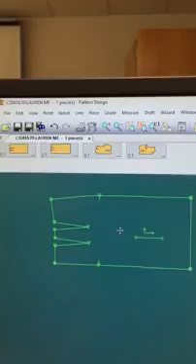Now bring them down into your work area.

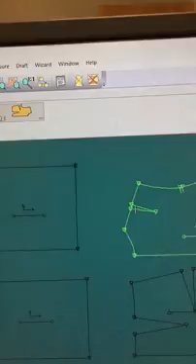The first thing that we have to do is to fold out our darts. So we go to Piece, Darts, Fold Dart In. It's telling us over here to select the dart on the side to fold.

We want to make sure that we include our fold lines, include dart drill holes, and include our notches. So we always want to fold toward the center front. So in this skirt, we're going to close on this side.

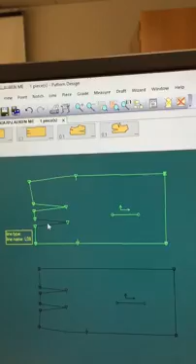Right click, OK. Okay, and it closed that dart.

Over here, it's asking us how far to drill to the apex. 0.25. Say OK.

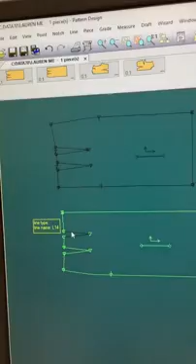Here's our center back. So we want to fold to this line. Right click, OK. This line, right click, OK.

This one is toward the center front. Input for our drill hole, 0.25.

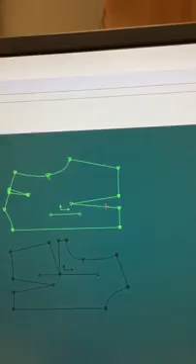This one is toward our center front. Drill hole, 0.25.

This one is toward our center front. Drill hole, 0.25.

This one you always want to fold down. So this one we're going to click this, 0.25. So all of our darts are folded out.

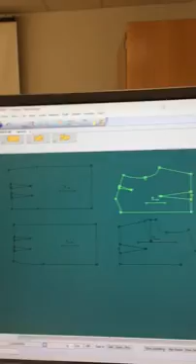Okay, now we need to see which one that we're going to fold on the mirror. This one appears to be our center front. So this is the one we want to fold.

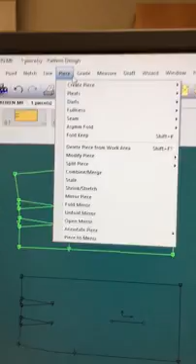So we go to Piece, Mirror Piece, and it says to select the piece that you want to fold. Make sure that you fold after the mirror. Right click, OK.

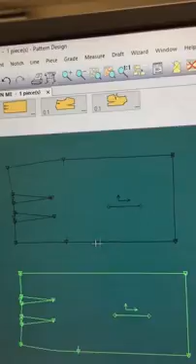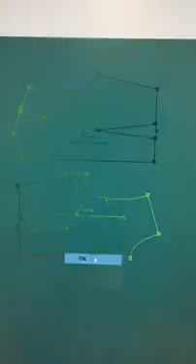Alright, and we have a dotted line there. This is our front piece, this is our back because we have a back dart. We're going to fold on the front. Right click, OK. Alright.

Alright, so we get out of there. The next thing that we need to do is to add seam allowances. Piece, seam, define/add seam.

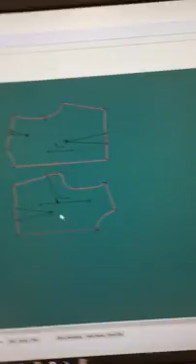I'm going to click on all of my pieces because I want a 1/2 inch all the way around. Go over here, 0.5. So I have a seam allowance on each piece.

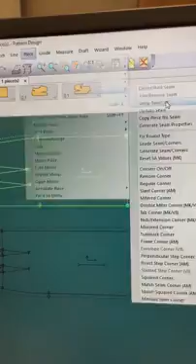But we can't leave it that way, can we? Right click, cancel. You have to go to piece, seam, swap sew cut. So we click each one of them and we swap the sew cut lines.

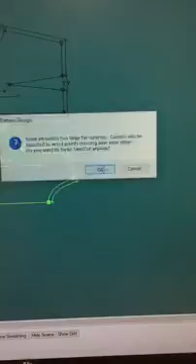If you get this error, that just means that you have some small areas that need to be swapped. Are you sure you want to? Yes. So now it should show you that you have either two solid lines or you have the solid line on the outside.

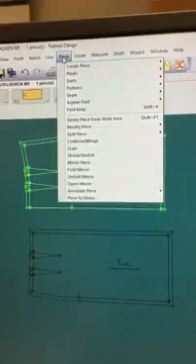The next thing, if you want to do, is to annotate the piece. So you go to piece, annotate piece, add annotation. So wherever you put your mouse, that's where you're going to put it.

So this is going to be my skirt, front, and I have to hit OK.

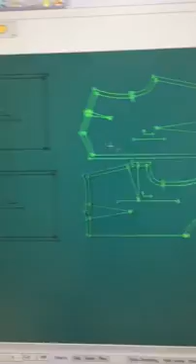Well, it's little bitty. So I go back to piece, annotate piece, edit. So I click on it, right click OK.

The box comes up, and in the default, say I try 5 and hit apply. Well, that's way too big.

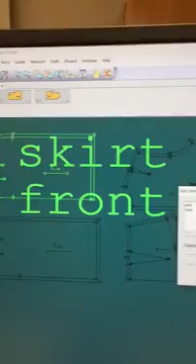So I go back and maybe 2.5, hit apply.

It's okay. All right, now if I want to copy that to the back, I just hit copy and it's attached to my cursor. I put it here and I go back to the box, and then I would take and then erase that and put back.

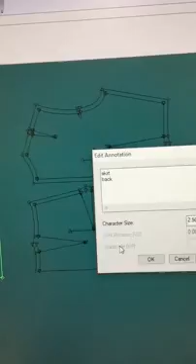Apply. Now that's changed. All right, so I want to copy again. We know that this is the back, so I leave it here, except I put bodice.

It's a little bit big, so maybe I want to take it down to 2. Hit apply. Maybe a little bit more, maybe 1.5, so I can still see everything that's going on.

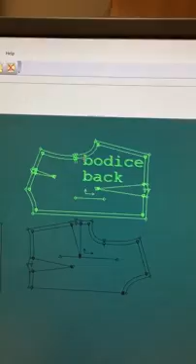Okay, and then when I hit move, I can move it to where I can actually see it. Copy. And then I edit, and then I do front.

And then when I hit apply, it says bodice front. And then I hit OK.

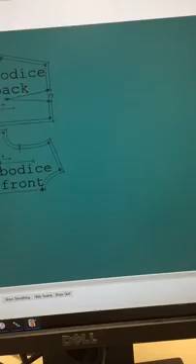And then I need to file, save my pieces. So make sure that you have save. So I click on it, right click OK. So all my pieces are now saved.

Now we're going to move on to video number 3, which is how to save your individual pieces as image files.